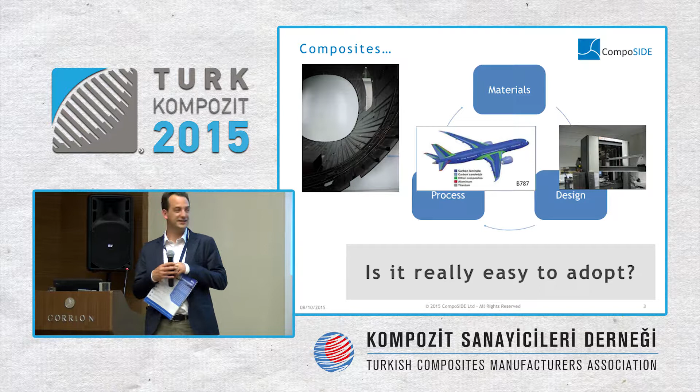It's very difficult with, oops, okay, composites. Are they really easy to adopt? They mix materials, process, and design. And we are in business with STRUCTeam to provide consultancy because there are people who need help. CompoSIDE is selling, so people need software solutions. They are inherently complex because of the combination, the interactions between material, process, and design.

You create your composite material in the mold. You buy the constituent. So Daniel mentioned he is representing a prepreg company. It's one of the parts, but it's not the material in its final form. And that makes it extremely tricky to adopt composites.

There are a lot more modes of failure. So in metal, you design with Von Mises. With composites, you've got 30 modes of failure per ply, then you combine them in various directions. It's really good for the engineer, plenty of options to look at, extremely satisfactory, but for people who make decisions, it's cost, it's time, and it's difficult to make a decision. Okay?

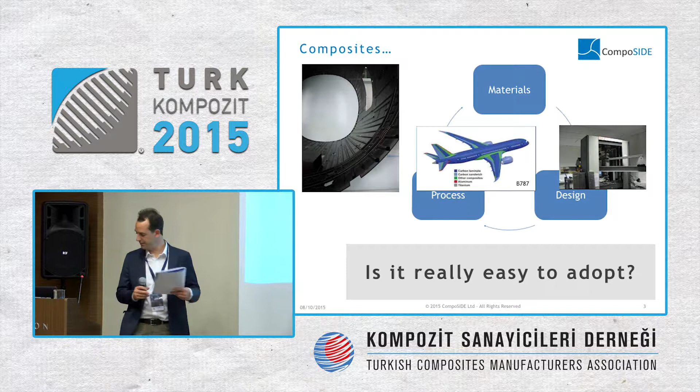Well, the composite engineer is lucky. He's got a very wide material palette, different fibers, different resins, different cores, different adhesives, and then you put the manufacturing process in the middle. So the number of options that you really want to look at, and maybe the car part manufacturers can confirm that. You know, is it RTM? Is it prepreg that I need to use? Is it thermoplastic, thermoset? In which format I need to buy it, etc.

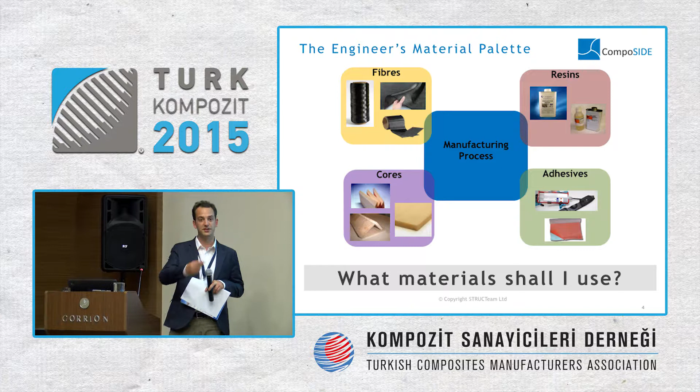The supply chain is extremely complex. It's difficult. I guess that most of the presentations today were about composites are great. Well, composites are difficult. Hopefully we'll try to bring an answer to that problem.

Manufacturing technology, which one? Wet lamination, press, infusion, pultrusion, prepreg, resin film infusion. Do I need to automate? Depends on my volume. What is the cost of that? How mature is the industry? And all those questions for the non-expert are only question marks. Every time you progress further, you'll create more questions.

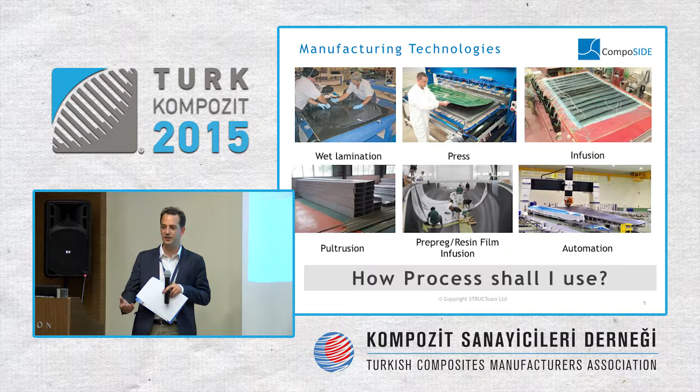Okay? So I consider myself a composite expert, and part of our role is to make it easier. And that's why we put CompoSIDE there, and this is where we met with Steve Tsai and his theory to make it easier to adopt. If it's easier, it's going to be cheaper. It's going to be faster.

So we talked about material processes, testing. All of you have had experience testing before. Did the testing answer your question, or did you have more questions after you tested it because you were not quite sure that the result was what you expected? How much did testing cost you? Usually much more than you anticipate.

So when we do a budget for testing, let's say it's 5,000 euros, we'll usually provision 10, because there'll always be a problem somewhere. Because you need to trace from material right up to the end. This makes composites really difficult for industrial applications.

The growth of the composite market is in large industrial applications. The carbon fiber industry and those applications started with niche applications, sports cars, leisure goods, racing boats, extreme weight saving applications. Now we are talking about mass automotive, oil and gas, architecture. It's different beasts, different market sectors, different requirements and different risks.

To manage your risk, you need to manage your materials. You need to control your design. You need to control your processes, which is where the composite industry is going step by step.

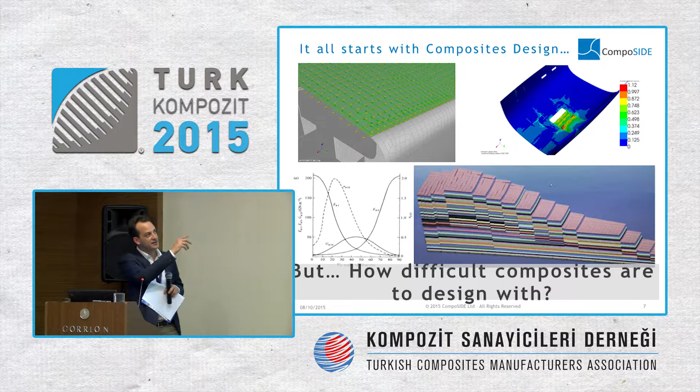So a short note about what is design.

Today, and that's an element of technology, it's a new reality. CompoSIDE is a software company. When you look at traditional engineering software, it's one person, one license, one computer. It's very good, because if the person who is at that computer is on holiday, nobody else can use it. It's a bit extreme, but that's pretty much the model.

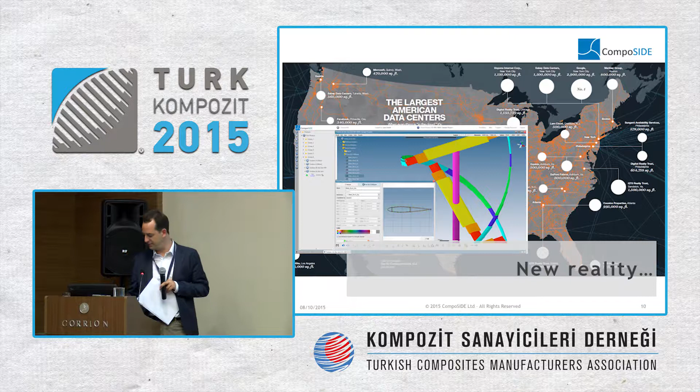I think most engineers tend to be analysts. It's easy to be an analyst. You have a problem, you check whether it passes or fails, you use a tool, etc. With composites, engineers need to be design engineers. You need to have creativity with material, with the processes to combine all those options. Okay? And that's where it's different from traditional materials. So we tend to lean towards the idea that design engineering is an art with a bit of science support.

Okay? So as soon as you work in composite, and I think that's one of the very rewarding things for me after 15 years in this industry, is that it's never the same problem. Yes, there are problems or challenges. Let's call it challenges. Problems is a bit negative. And our brains are linked with that.

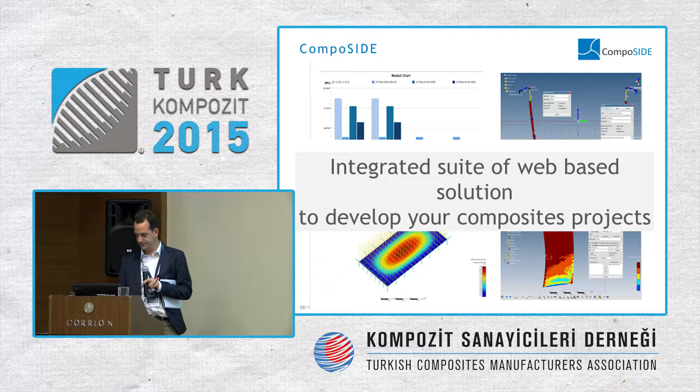So this is why we put CompoSIDE as an integrated suite of web-based solutions to develop your composite project. Okay. Solution architecture has several layers. Web-based, so for the users, as many users as you want with one subscription. Geographical location does not really matter. Software deployment is easier. Each of the customers are updated at the same point.

Those of you who use CATIA are very happy every time they receive the 10 CDs, and each engineer needs to update his own CATIA from version 22 to version 23. How much does it cost to an organization? It's just tremendous. And is it what engineers want to do, spend time updating software?

Security, well, this is one of the things where the cloud, every time you say cloud, you say, ooh, security. Maybe the fact that many celebrity iPhone pictures leaked onto the public domain is not so good, but there are strategies for that, there are certifications for that, and that's the solutions we use.

And scalable. Maybe today in your team, you've got 5 design engineers using composites. If you're successful in your early development, tomorrow you'll be 20. You don't want to pay 4 times more to grow for that. You want to be more efficient. You want to scale, to have scalable solutions.

With CompoSIDE, you get a centralized solution for all your project and user roles, material data for all your company, management of your engineering process for your bill of materials, engineering and manufacturing bill of materials. It can be used to some extent for your knowledge base about composites, and you can standardize your reporting and bill of material reporting.

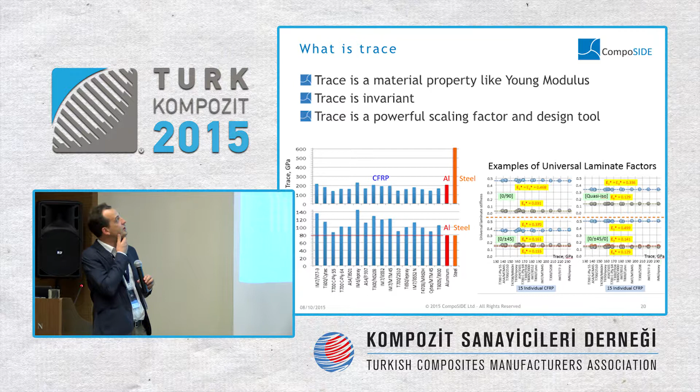So trace is an invariant, a material property like the Young's modulus. So we introduce a new material property, but only one. Look at your characterization of a carbon unidirectional. You'll have about 25 properties at the minimum. There we have one. The trace is an invariant, and it's a powerful scaling factor and design tool.

So here we've got the trace and the specific trace. This scaling was done initially by Steve Tsai and his team at the laminate level only. When we kicked off our joint project together, we looked at beams and sandwich panels, because that's what the industry is using. And we wanted to see the relevance with a real design case before going too far and implementing it into CompoSIDE.

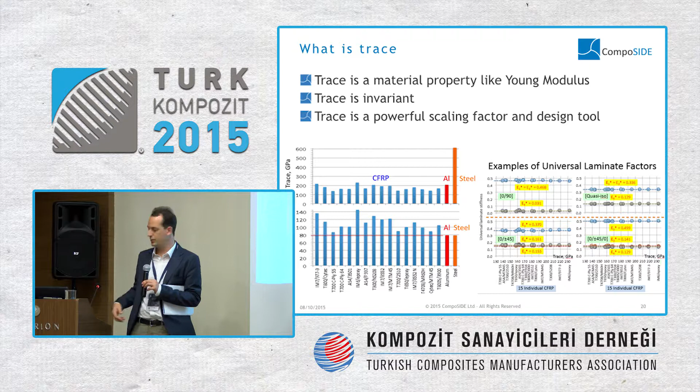One of the key elements of trace in the laminate design is the homogenization. Use thinner layers, but use more of them. That's one of the principles that Steve has been preaching for many years. If you increase the degree of homogenization, you get fewer angles, thinner plies, and you get a behavior of the material that will be closer to isotropic materials or metallic materials, which is where the future of carbon fiber composites is, in those industrial sectors.

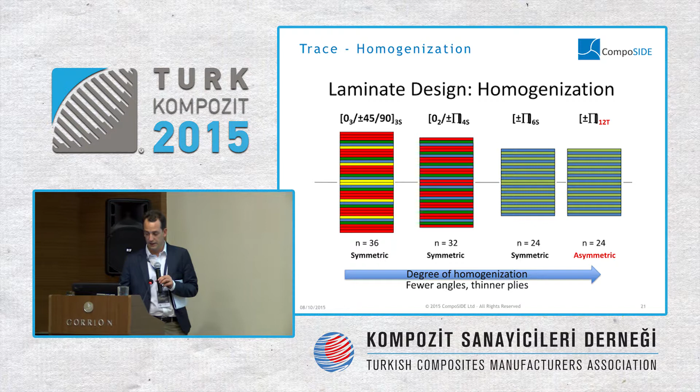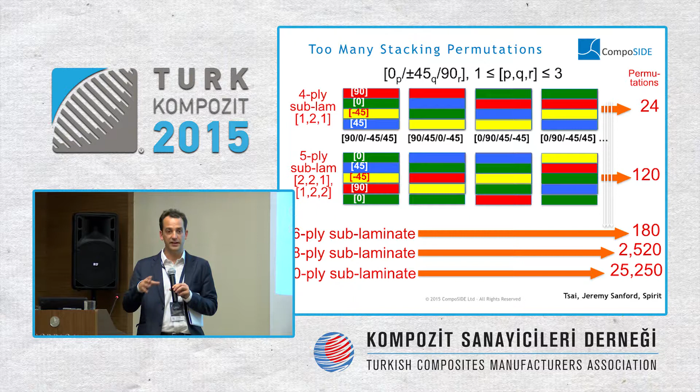I'm not too sure I understand that slide. It looks very complicated. But basically, what has been done is that many stacking permutations have been checked to assess whether the trace was affected by the fiber orientation and the stacking sequence. That was the early work that Steve Tsai did and confirmed that it worked.

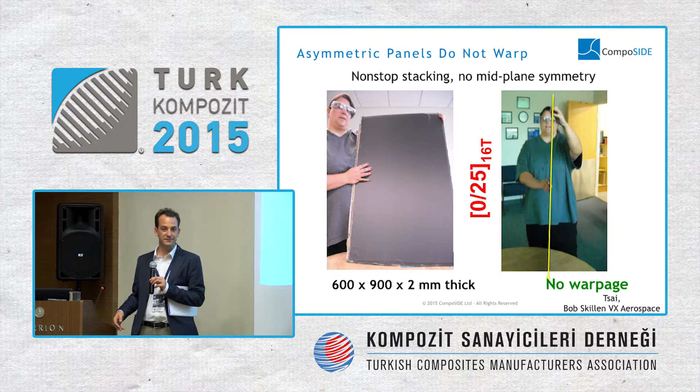This is an example of an application of the homogenization: by having extremely thin plies and an asymmetric panel, you end up with no warpage. Which can be interesting for the automotive application because, as soon as it warps, you've got a bit of a quality problem, and I'm sure you want to push asymmetric laminates as much as you want, or to have the freedom to do whatever you want.

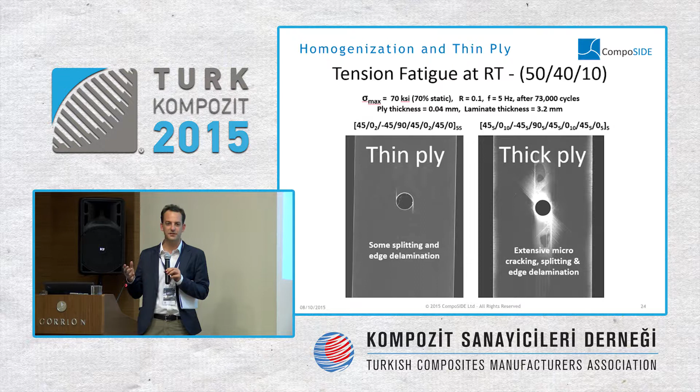Another application of the homogenization and the thin ply is about the failure. You see that with the thin ply, it's much more contained. It behaves much more as an isotropic material. It feels really strange for me to talk about composites as an isotropic material when, for the last 15 years, it has been exactly the opposite. But you will see where I get to.

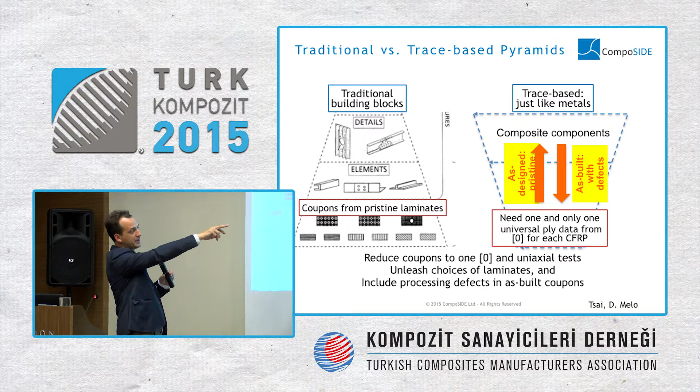Here we've got our traditional testing pyramid. We start with the coupons. How many coupons do we need for an aerospace qualification? Maybe Daniel is well placed to say, but it's far too many. Then elements, then details. With trace, you need one and only one universal ply data for each carbon fiber product that you're going to use. So it's only a fraction of the cost. And it's actually one that is easy to test. The Young's modulus is pretty straightforward.

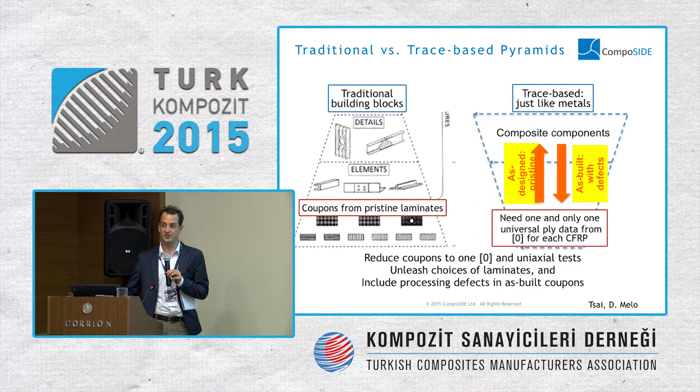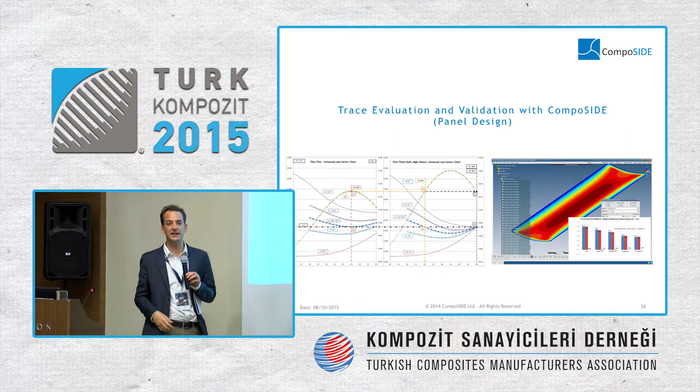What we've done with CompoSIDE is to evaluate the trace and validate it on a panel design element, to see the scalability. What is the applicability of trace-based design on real structures? Because at the end of the day, all these theories are good only if they are eventually used in the industry. It won't happen tomorrow, even if I'm really convincing, but it needs to be useful for the industry. Otherwise, there are not so many

benefits. So here we can see a comparison of the trace-based results versus the FEA-based results computed with CompoSIDE. On the top row are different combinations of laminates: single skin panels, sandwich panels with different stacking sequences and different homogenization rules. The NCF layup gives you an indication of the fiber angles and materials used. We used different fiber moduli to see the scalability, from standard modulus to intermediate modulus. We tested different NCF architectures between thin and thick plies to see, does it apply to everything? Does your laminate need to be homogenized?

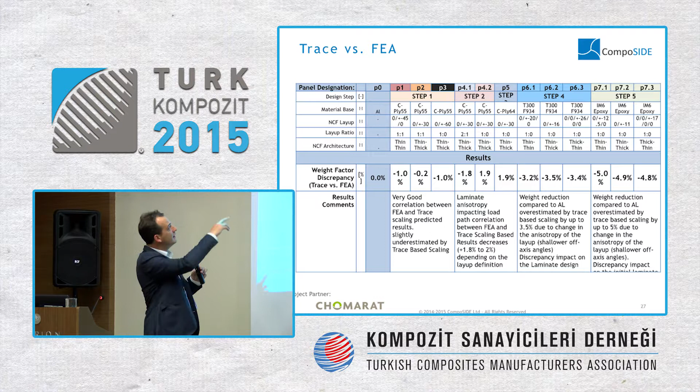The weight reduction compared to aluminium is slightly overestimated by the trace by up to 3.5%. For an engineer, that's a lot, 3.5%, because it's not 0 or 0.1%. For somebody who is making commercial decisions, that's acceptable. Okay, so this initial step was very successful in showing that trace can, within a number of parameters, materials, layup, and ply architecture, deliver consistent results, which gives confidence to bring this to the next step.

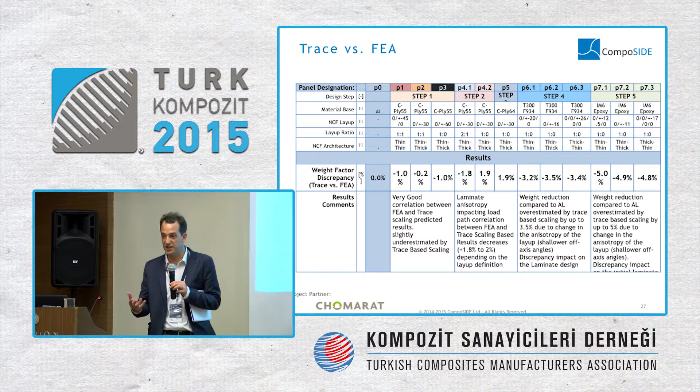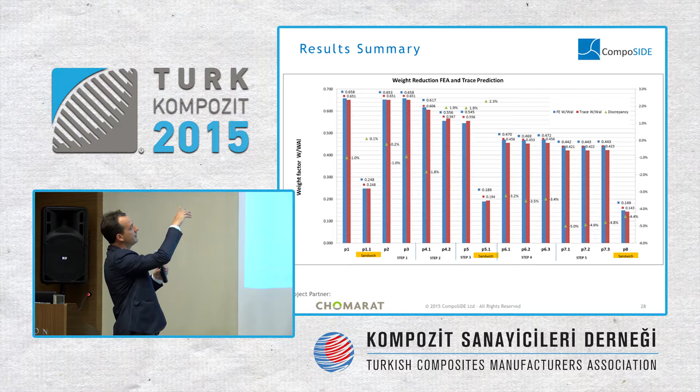Here you've got, in graphical form, the comparisons that were done on those panels under a variety of loadings, so some were in bending, some were in-plane loadings, etc., to really address the typical design cases that a composite structure will be subject to. And you can see that the consistency between the two results is quite high. On the left-hand side, you see the weight factor between the composite solution and the aluminum solution, and the comparison between a traditional method, with all the qualifications and analysis that it implies, and then the trace.

Sorry for interrupting you, because I'm a bit confused, because at the beginning you were referring to failure criteria. So are those data referring to stiffnesses or to strength? Stiffnesses. Okay. Because this is quite well known for failure criteria, but it has nothing to do with failure. This is with stiffnesses. Yeah. No, that's a good question. Some structures are stiffness critical or strength critical. For the strength, this is still being assessed. I think it's quite obvious that it's stiffness. We didn't mention any failure criteria. Okay.

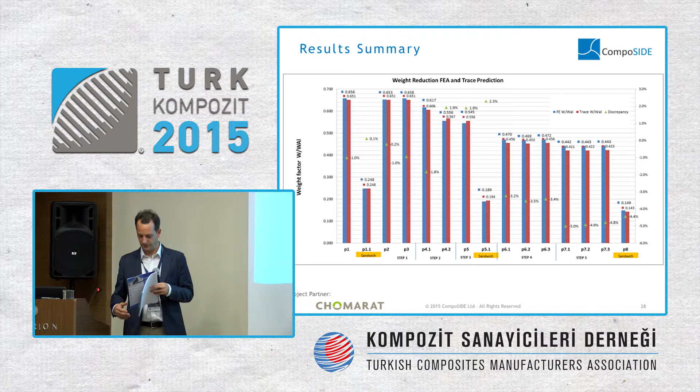So what it means is that within a few weeks of starting the project, we were able with CompoSIDE, which is a new product, to evaluate this new theory and to come up with some next steps and some validation points that enable this theory, hopefully, to move to the next step. This was helped by web-based agile design software, where we shared access across the team members, and everybody could work together.

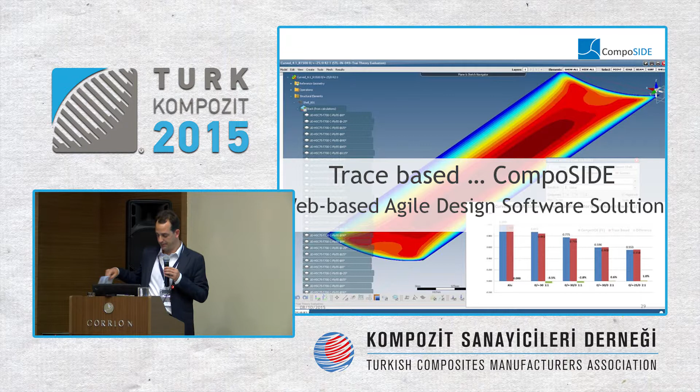At the end of the day, everybody is clear, and that's why I started this presentation not by saying composites are great. Composites are difficult. Otherwise, why would we be working with it? Why would there be technical people all over this show, all with their own little solutions? There are different ways to skin a cat in the composite industry. But I think there are means to make it easier. Obviously, great fusion between the two. Hopefully, we are trying to do that well. So what's next?